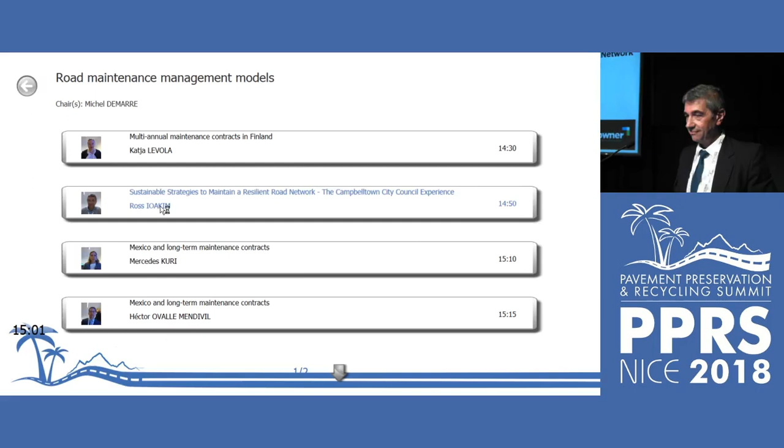As Downer's sector lead local government and airports, provides Ross with an opportunity to work closely with customers in implementing sustainable pavement preservation solutions. I read that Ross worked with SAMI. SAMI, if I'm not wrong, is an acronym for Stress Absorbing Membrane Interlayer.

Correct. You've got it right. That's a company I've known for quite some time. I started from the beginning. Good. Me and Azim are good friends.

Absolutely. And with his appreciation of the issues and challenges facing road and airport owners, Ross's next challenge is to assist with the establishment of a pavement preservation and recycling alliance in Australia.

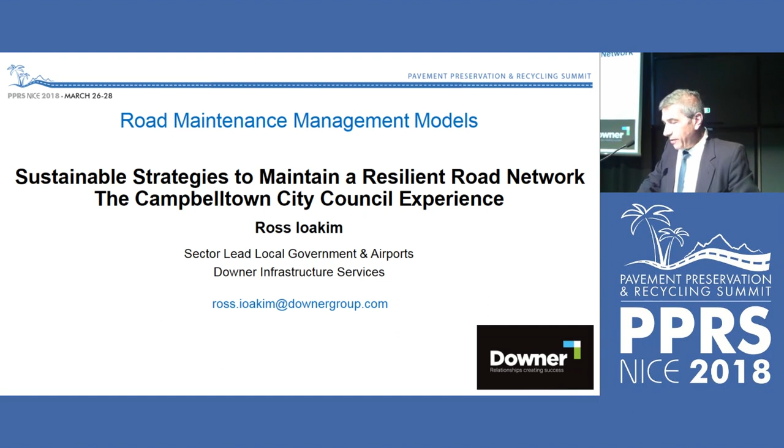So what I'm hoping to do for a little while is to provide you with details of a journey that we embarked on with Campbelltown City Council. The genesis of that journey began back in 2013 when we introduced the benefits of micro-surfacing to a group of Sydney metropolitan councils. So our partnership with Campbelltown City Council continues to grow and has endured through strict commercial procurement processes. Everything in Australia is open tendered.

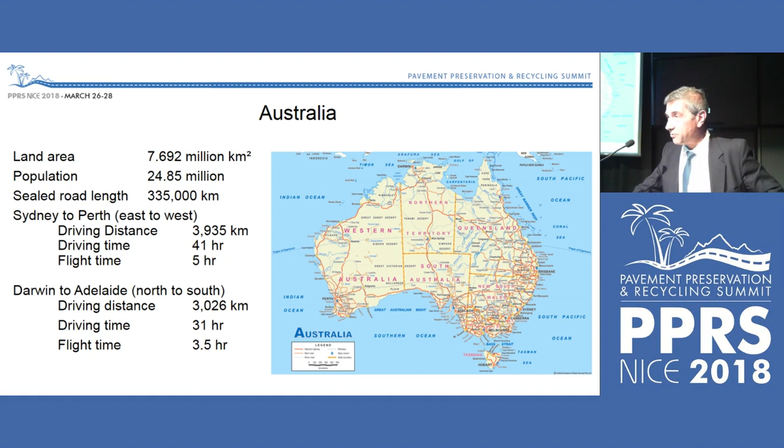I thought I'd just throw in a couple of slides, or one slide, showing you some of the key sites.

If you haven't been to Australia, you should make it your point to come. I spent 32 hours getting here on Saturday, so you should repay that and come across and have a look what a beautiful country we have.

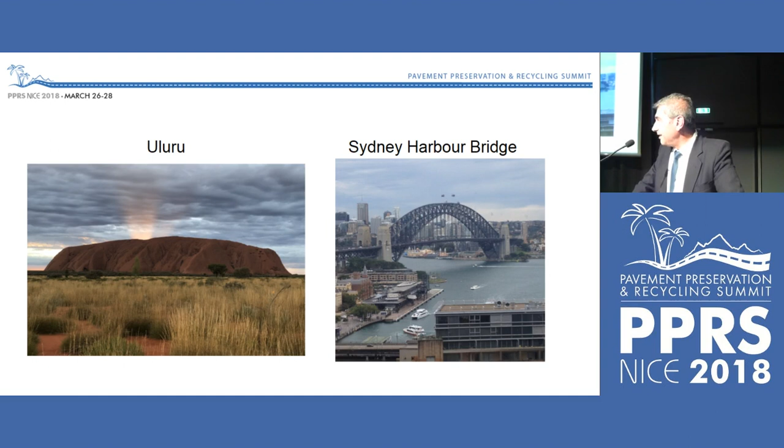So, Campbelltown, New South Wales. Campbelltown City Council, 718 kilometres of road infrastructure, with a replacement cost of about 400 million. This council has had rapid growth from 25,000 people in 1996 to over 150,000. And that requires a significant investment in infrastructure, including the road network, to service the growing residential, commercial and industrial estates.

Campbelltown, you can see where it is on the map. It's 55 kilometres south of Sydney. It's referred to in Australia as an urban fringe council. So it's not an inner city council. It's where housing developments go so we can house our people. It's got a lot of housing estates. Every capital city has got 10, 12 major councils that surround it as growth councils.

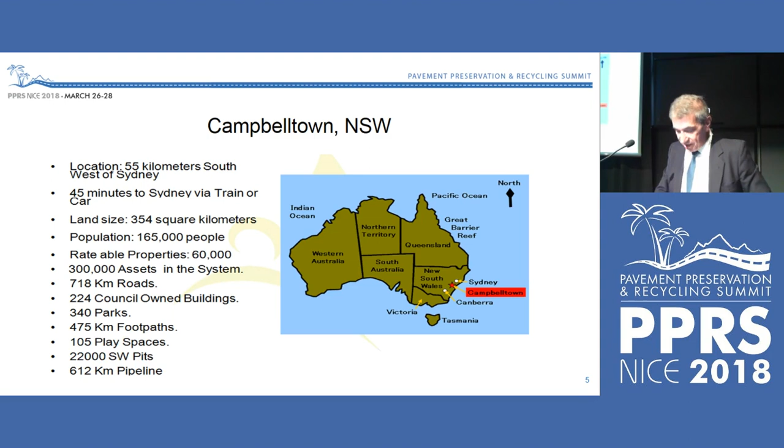So this council had recognised they need to do something else to manage their ageing road network. And the challenge was there for the councils, and we took the challenge up with them to help them understand a better outcome. So, due to the increased financial pressures to maintain local community expectations of smooth roads, Campbelltown City Council has developed and adopted a sustainable pavement management strategy that optimises the budget capacity and also meets local communities' expectations.

So typical of urban fringe councils like Campbelltown, there's a proportion of the road network that is classified as rural. And a lot of these councils are facing the pressures to resurface existing spray seals and provide smoother surfaces, which their residents demand, because we always hear, my son can't ride his skateboard on the road because it's too rough. And we say to him, he shouldn't be on the road. But anyway.

So the following slides will provide an overview of the sustainable pavement management strategy and demonstrate how Campbelltown City Council has increased the number of roads it treats annually, whilst improving the overall condition and satisfying their community's high expectations, all within existing financial budget constraints. So here we go.

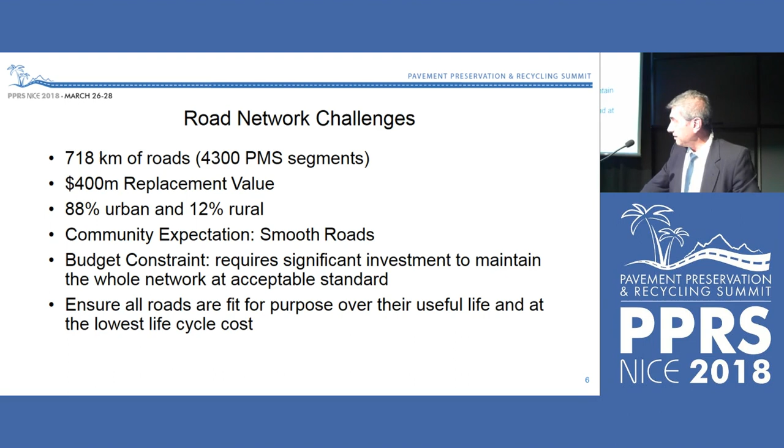You've got to start off knowing where you're at. In Campbelltown City Council's road management plan, they have developed levels of service for all the classes of their roads to provide a basis for the life cycle management strategies. The levels of service support the council's strategic goals and are based on customer expectations and statutory requirements. The council-endorsed levels of service provide the road asset management team with guidance and scope of current and future services.

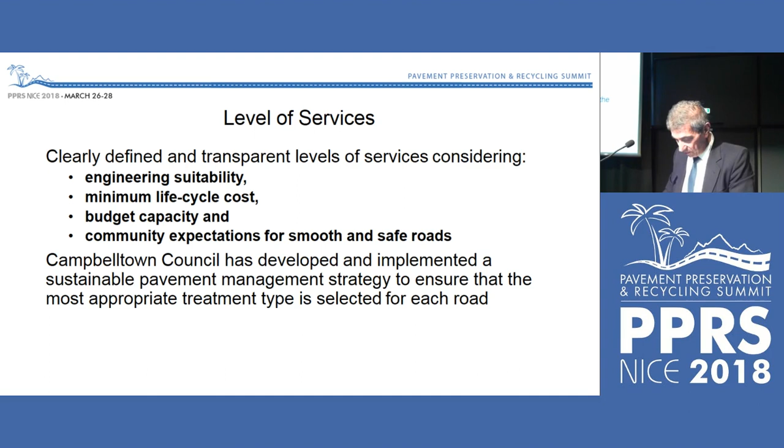Now, you can't do much on a road without data. You've got to know where you are, and it helps to work out, when you've got there, have I done anything that's actually improved it? So they undertake data capture and condition assessment annually on 20% of the network. They store, manage and analyse it in a proprietary PMS. I'm sure you all understand the benefit of good data.

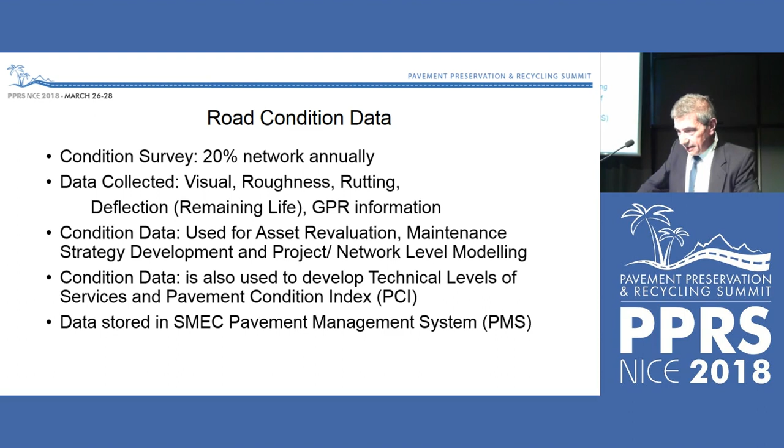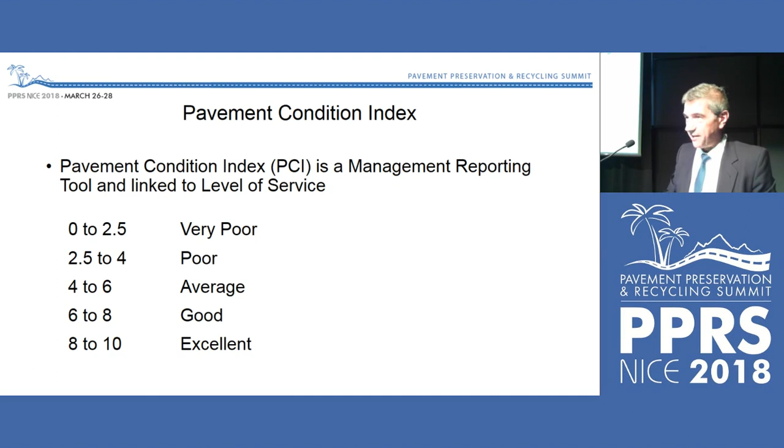They have adopted the Pavement Condition Index ranking to assign a PCI score which assists with funding applications and is used to report overall road network condition to the community. So 0 to 10 is their ranking, you can see that for yourself. It's not a bad reporting tool to have a PCI. They use an algorithm to come up with it. Don't ask me how they do it, but it's quite robust.

In 2002-2003, Council decided to upgrade and maintain its whole network on different PCI levels based on the classes. And you can see obviously a higher class of road like a collector road has got a higher PCI than a cul-de-sac or a residential road. They agreed on a PCI target of 6.75.

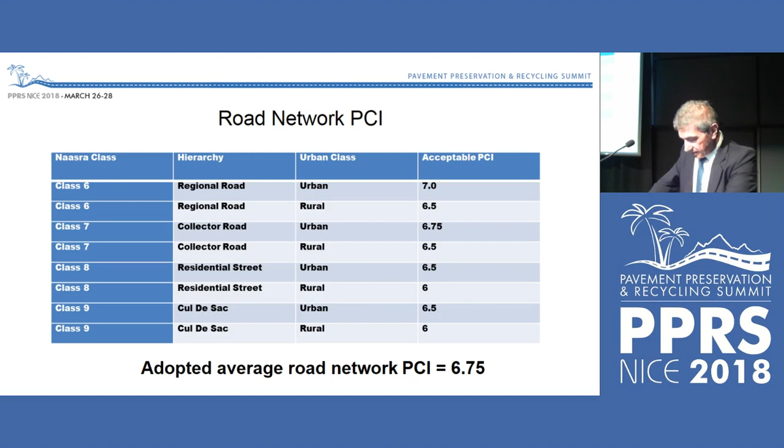This all comes together in the end when you look at how it all happens. The road asset management process is fairly important, and to achieve the PCI target levels that they have set, a comprehensive pavement management strategy was developed. The objective of the strategy was to maintain and improve its pavement infrastructure assets for the long term. The strategy flows through the PMS and considers budget constraints, current road network condition, deterioration curves and treatment options. And the flowchart shows how the PMS utilises data in generating effective and prioritised work programs. So it's hindsight, foresight, all together.

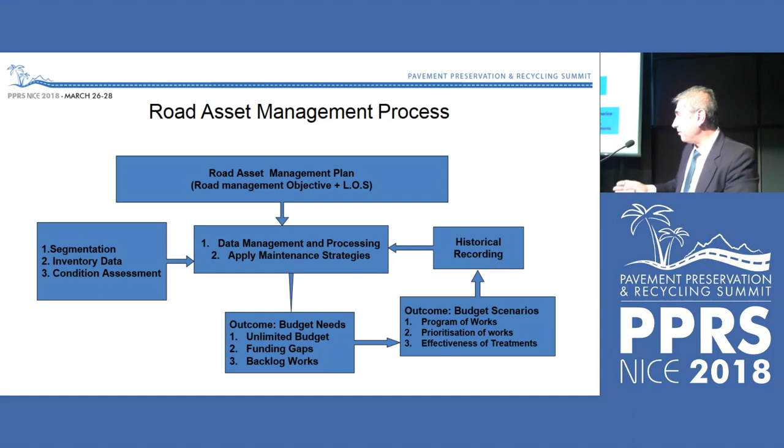So this is what I think the organisers saw about models. It's actually the modelling, not the models. So sorry if you've come to the wrong session.

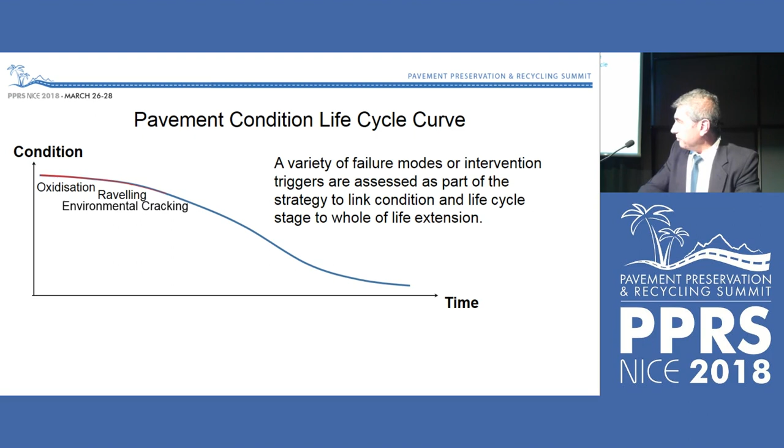This is the typical pavement life cycle curve which you're all familiar with. The road starts off in good condition. Over time, it deteriorates, and that time is what's critical. In Australia, and I suppose most parts of the world, low traffic, low volume roads suffer from the environmental aspects. As life goes on, if nothing's done, you get to the point where the road's stuffed. You're either in a preservation phase or a rehabilitation phase. So it's important to know from your data where you sit on your road network. It's pretty important for each segment to have a good understanding.

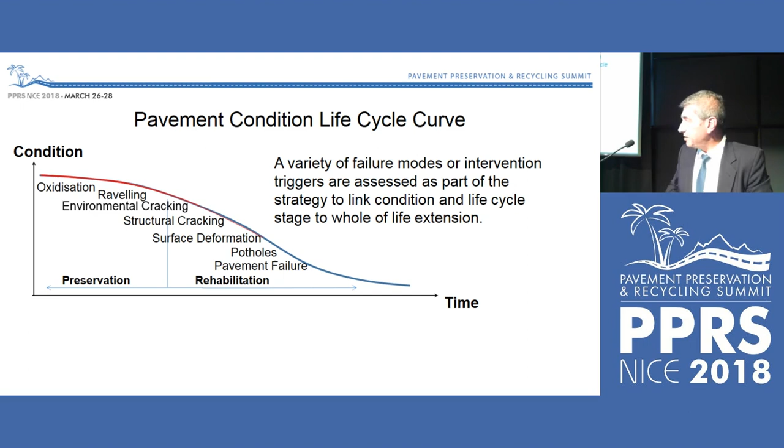So we get into the nitty-gritty, strategy development. A variety of the failure modes were assessed to identify each individual road segment's PCI rating, which is used to identify the most appropriate treatment options to extend segment life and improve its PCI. Treatment options are assessed on a cost-benefit analysis. And the PMS which they've got assists with predictive modelling, including maintenance application choices, intervention triggers, and life cycle costing.

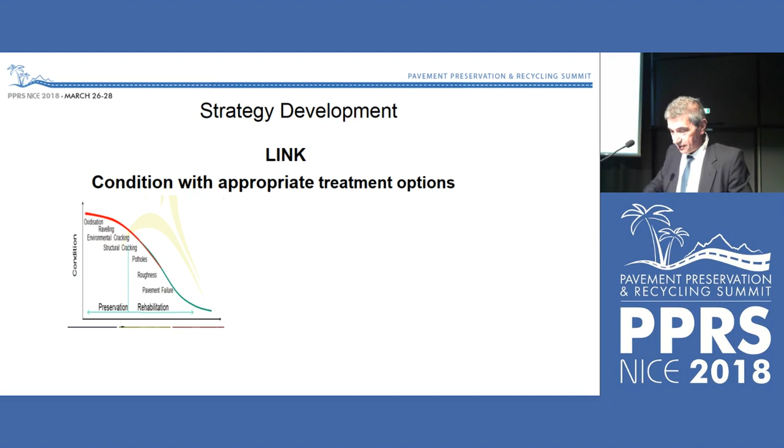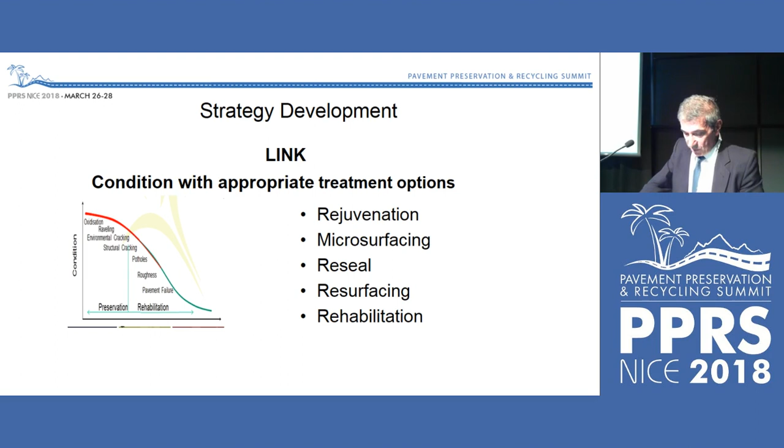And here's a list of some of the treatments that are currently used by Campbelltown City Council. I've got to say, for one of our clients, they use every treatment option available to them. And the key thing that they have done since we started working with them is that they've integrated pavement management treatment options in the pavement management system to achieve what they believe is long-term financial sustainability in its road network management.

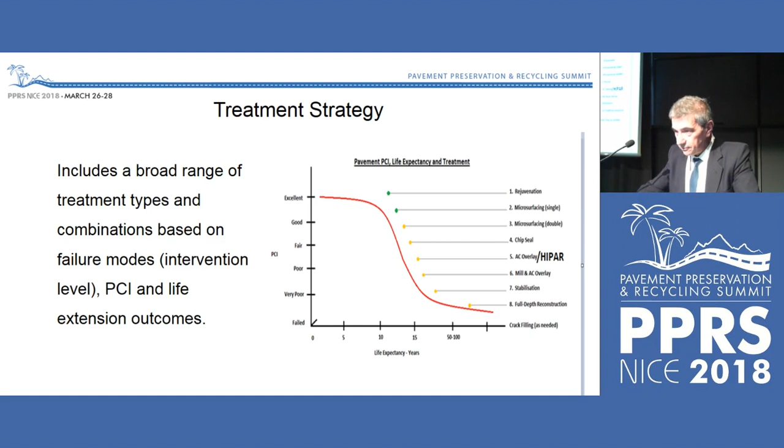And I'm just going to give you some, because I know you'd like to see pictures, we all like to see pictures, just some photos of some of the road maintenance treatments that are used. Now, rejuvenation and a polymer modified mastic, these are spray applied treatments. They're a thin surfacing treatment, early intervention treatments which are aimed to halt oxidation. Australia has adopted these treatments sparsely, some better than others, but commonly they are used.

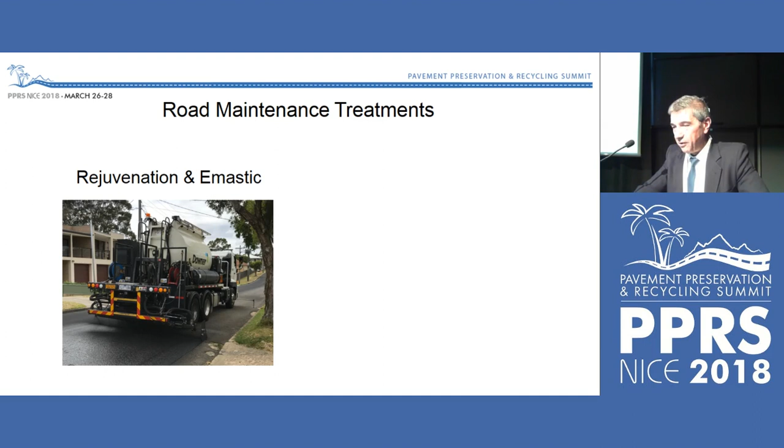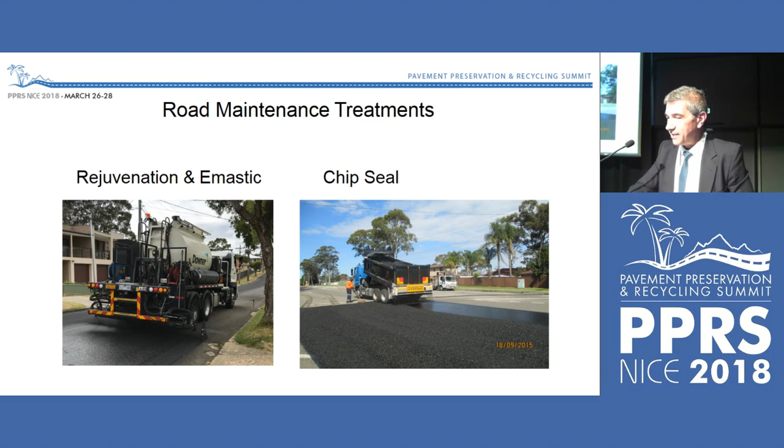As I said before, chip seals are the common treatment in Australia, not so much in the urban areas, but certainly in the regional areas. However, urban fringe councils, councils that are struggling for funds, still use chip seals because they're the most cost effective. And from a life perspective, rejuvenation, the polymer modified mastics, you should get a 5 to 7 year life extension. Chip seals will give you up to 10 years.

Then we've spoken about microsurfacing. Microsurfacing, the life is 10 to 12 years before you need to retreat. The key thing that I stress is that you need to know what is the treatment that you should be doing after you put whatever you have down. So it's about working up the life cycle of the treatment as well.

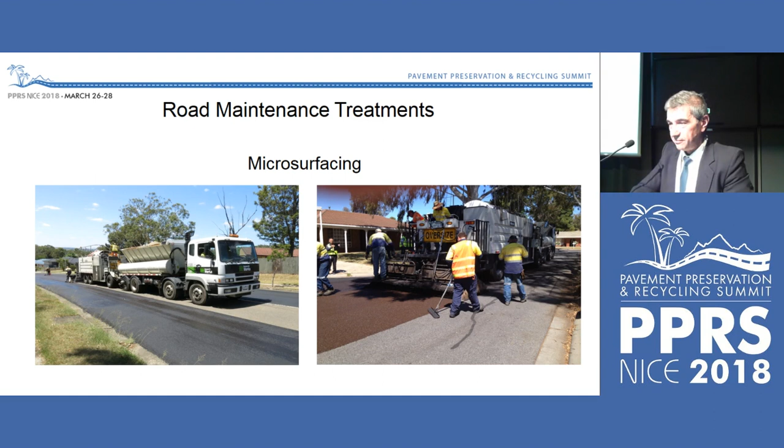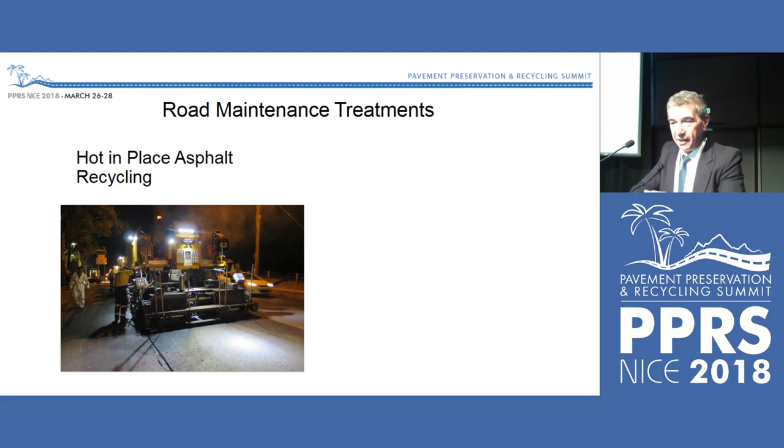Hot in place asphalt recycling. This is one council in Australia that still uses this. It's not used a lot, but they're seeing it from a sustainability point of view. If you've got good shape and it's just the asphalt that's got some age, environmental cracking, it's much more effective than doing hot mix, which is the default treatment for everybody, probably the highest unit cost in Australia.

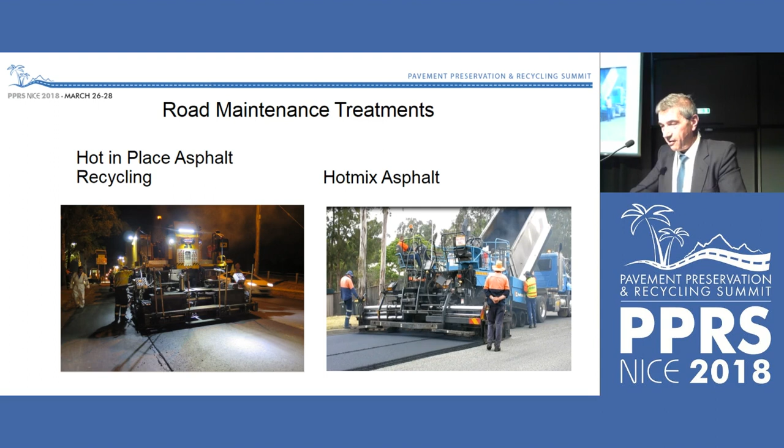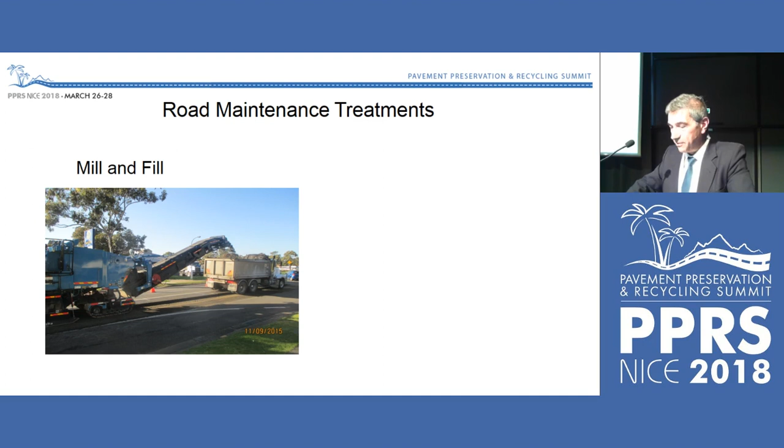And then we talk about mill and fill or inlay type work where you're taking off. Luckily in Australia we utilise all the RAP. It goes back in anywhere up to 40, 50, 80% depending on what plants you have, but RAP is an important component of roadworks to keep the cost down. And certainly in situ stabilisation, foam bitumens, combination of binders, cementitious. So the whole gamut of treatments is used by Campbelltown City Council.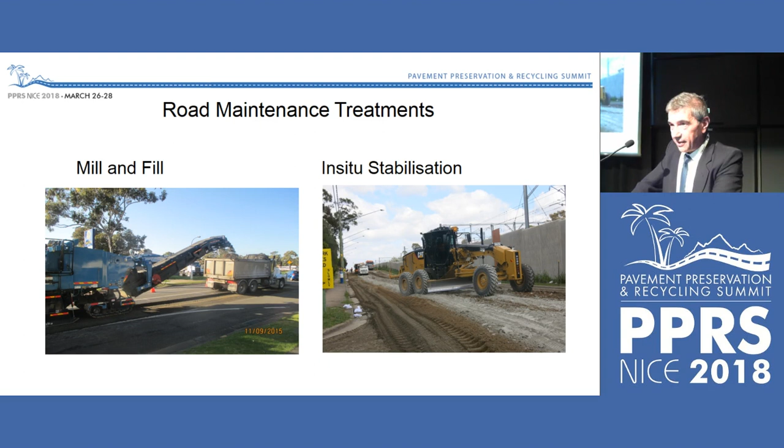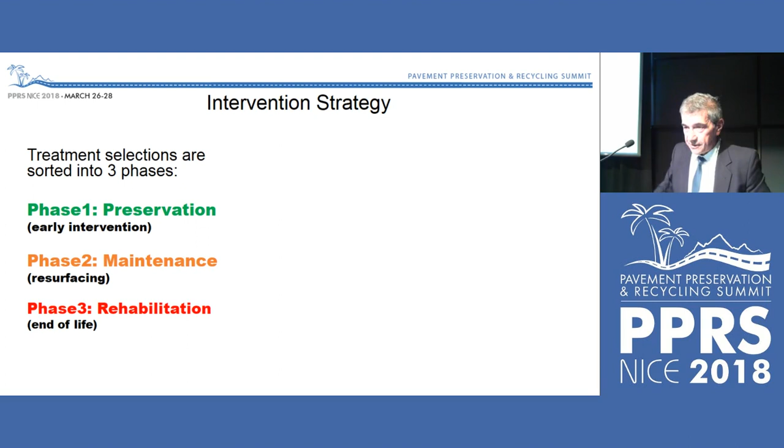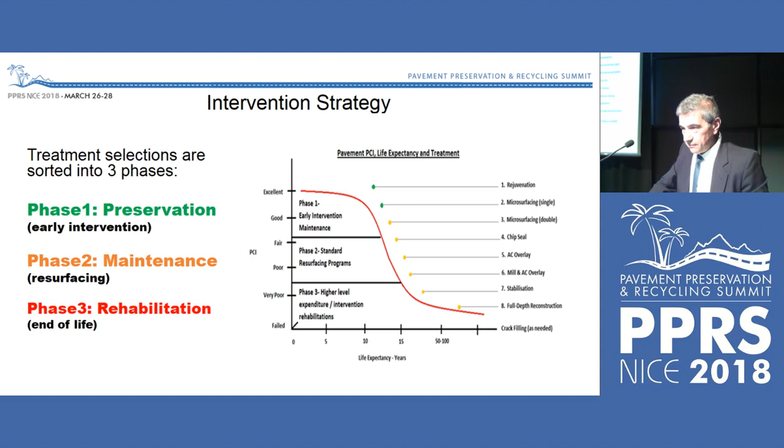So this slide explains how part of their strategy is to look at their data. Where is the road, in good condition? Is it in fair condition or is it in poor condition? And they allocate the treatments depending on where it's at. So 3 phases of treatments: preservation, which they call early intervention, a maintenance phase, or a rehabilitation phase. Okay.

So the thinking there is you want to keep those roads in good condition for quite a while. So if the road's in good condition, they'll actually program to retreat with a preservation treatment every 5, 6, 7, 10 years, depending on where it's at, to stop it going down to phase 2. And phase 2 is where most of the work is done. Asphalt, mill and fill. They're the treatments that you do to stop that segment of road going into a rehabilitation requirement.

So the whole strategy is keep your good roads in good condition. Your phase 2 roads, stop them from going into a phase 3 position, which means higher dollars to rehabilitate. Pretty simple strategy. But they've actually got their funding model set up to achieve that.

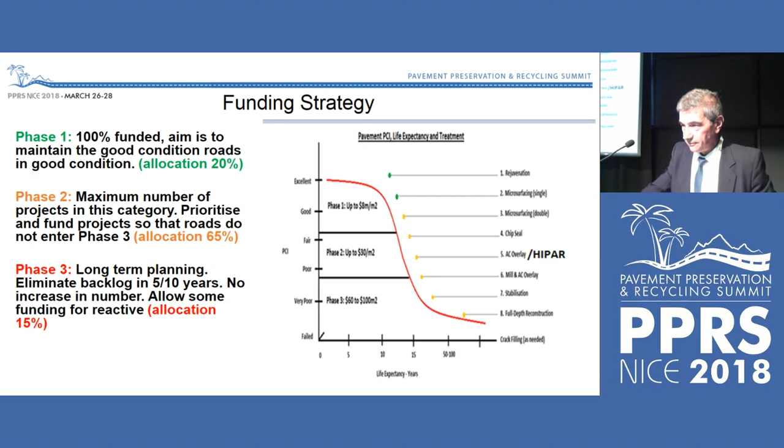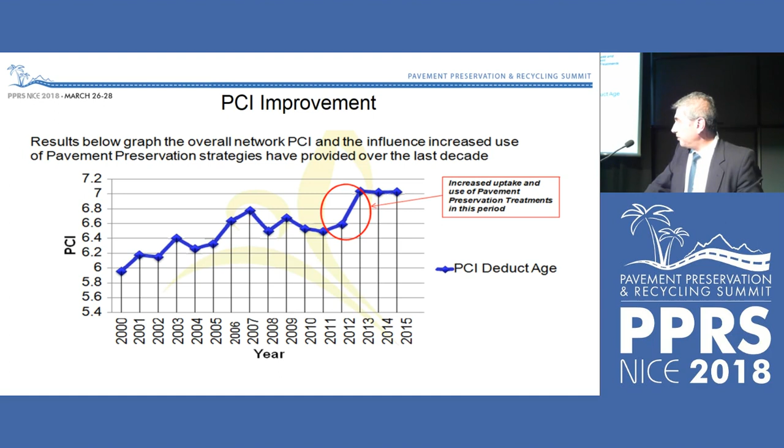But they have observed in about 2013 a bit of an uptake from about 6.6 to 7 when they adopted the pavement preservation treatment strategy into their PMS. And they continue to do more and more pavement preservation, keep their good roads in good condition for longer. Some of the trends, obviously you can see the PCI going where it is, but also cracking and ravelling have been arrested, showing that the environmental type factors are being fixed up now.

One of the things we have noticed here in Australia is the change in bitumen from locally produced to imported. We're noticing that the road network, especially in the areas with low traffic, is starting to show signs of oxidation much earlier than it used to. Probably by year 8, they need some form of treatment before they start to ravel. So changes around the world are affecting Australian roads from the point of view of bitumen importation.

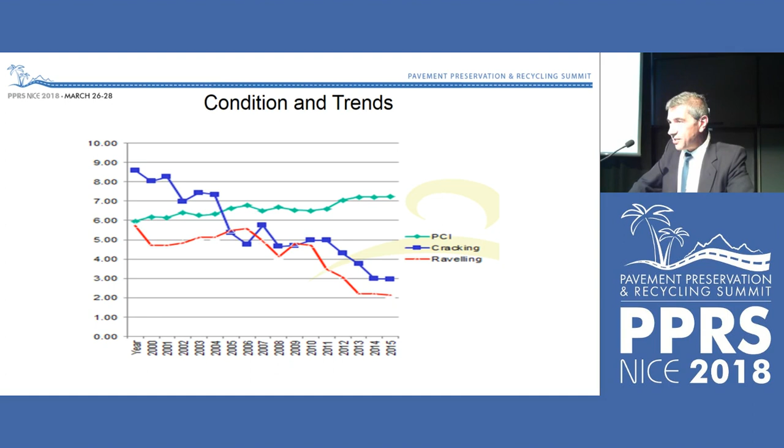And these are the roads that are generally in the urban fringes where the subdivisions are growing and growing and the roads aren't lasting to what was expected. We keep on getting asked, I've got a road that's 30 years old with 30-year-old bitumen and it's in great condition. I said, well, unfortunately, you can't get 30-year-old bitumen anymore. That was good quality. We've seen a change, as I said before. It's unfortunate. I'm not sure if you're seeing that as well.

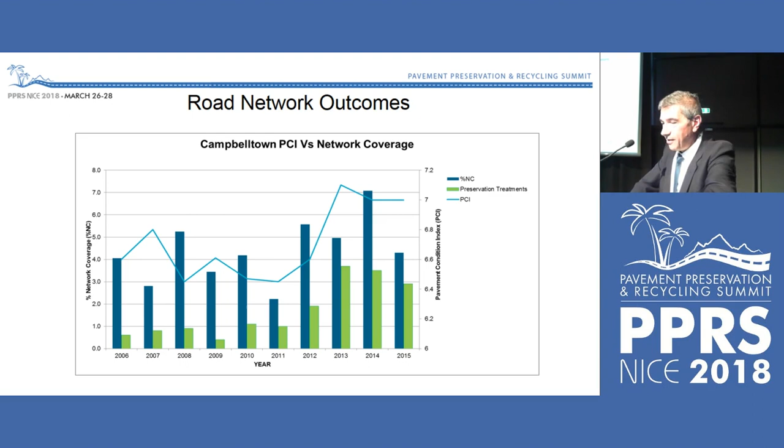As you can see, our friends at Campbelltown, their aim is for a network coverage, which is on the left-hand side, anywhere from 7% in 2014 up to 4%. So they understand that they need to do around 6 to 7% of their road network. So it's a key indicator for most people to know what you're actually doing. And you can see the PCI is keeping trend, and the green chart is the amount of pavement preservation treatments. So with the lower cost treatments, you're covering a lot more ground for no additional cost.

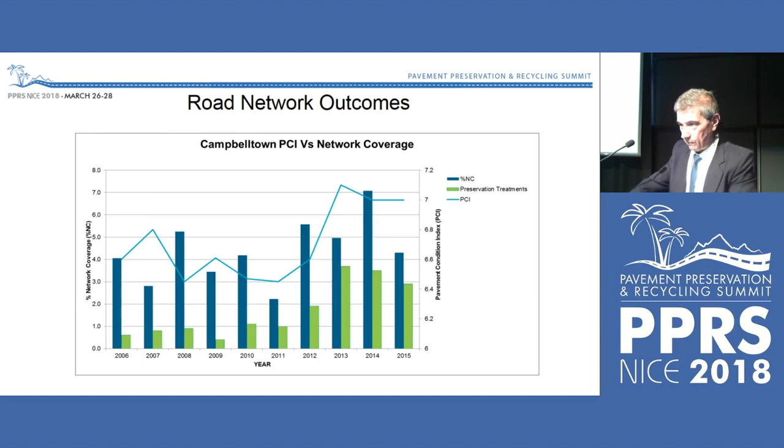Could you please go to the conclusion? I will. 2 more slides. I'm there. Thank you very much.

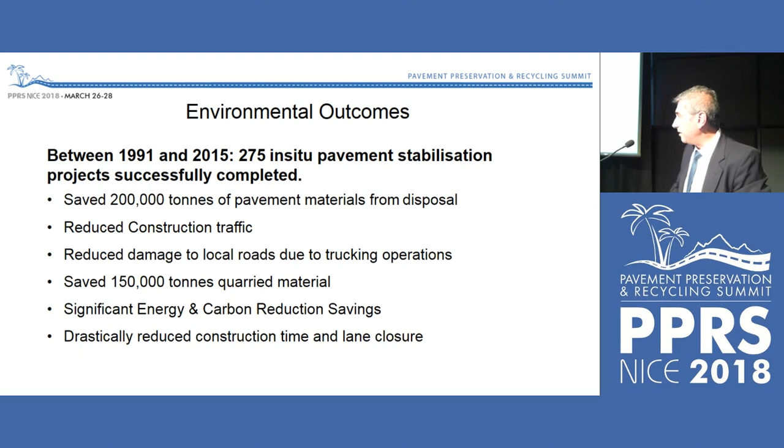Just the last thing, environmental outcomes. You can see there that by adopting in situ recycling, there's been quite substantial environmental and social benefits by changing from reconstruction to in situ stabilisation. And also from a financial perspective, they've been able to cut back their backlog of roads from 33 million to 12.5 million in a 15-year period.

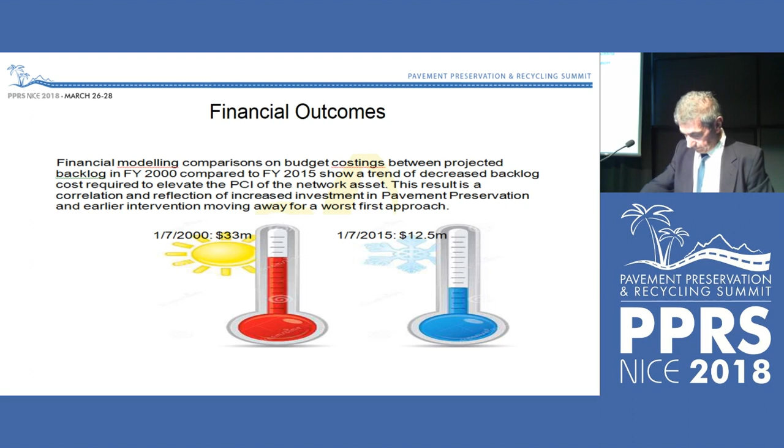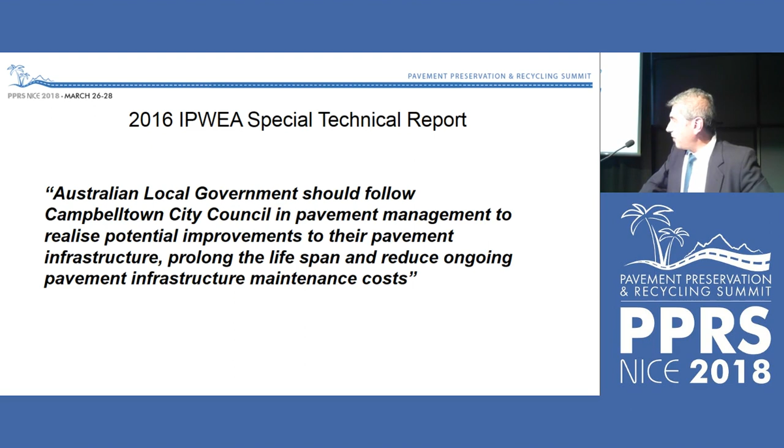You can all read that, but this says a lot from the IPWEA, the association that represents the local government engineers. And that's a fairly strong statement. They've had an endorsement that they certainly are keeping ahead of the game in the way that they manage their road network. That's just a pretty way of showing how it all goes together.

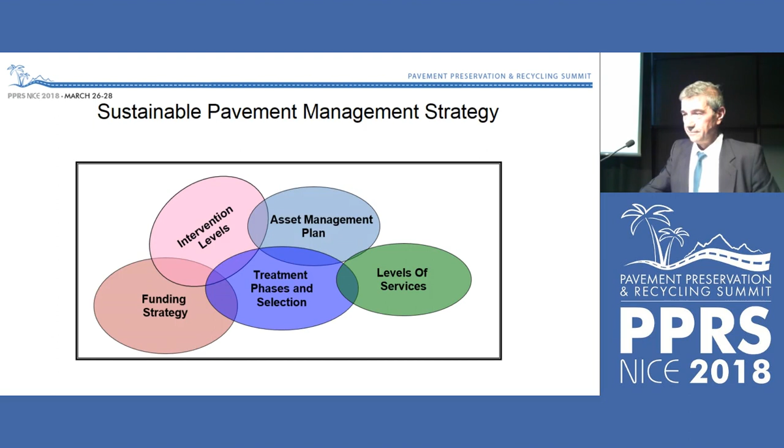So in summary, the outstanding results are a direct reflection of the proactive approach taken by Campbelltown City Council's asset management team and adoption of an innovative and sustainable road asset management strategy, combined with the adoption of pavement preservation treatment options for the maintenance of roads in good condition to further extend their lifespan.

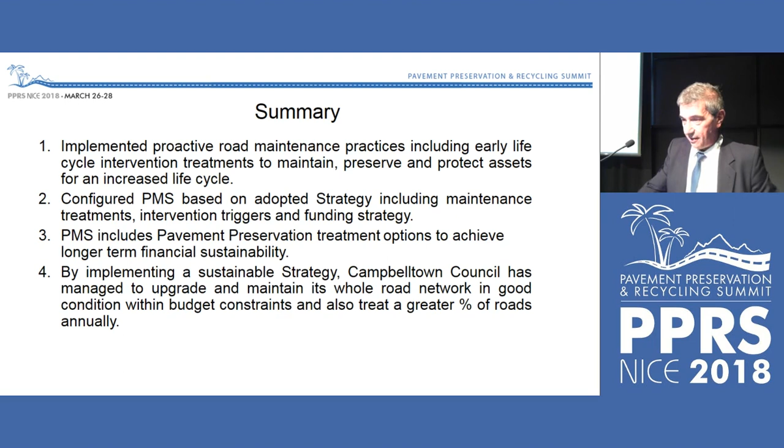So it's been a really rewarding journey for both them and us, and I'd like to acknowledge the gentleman who we work with closely, Mahbub. He was presented with the International Slurry Surfacing Association's Award for Excellence in Pavement Asset Management International, and he's gone to present this presentation all around Australia, and he keeps on winning awards. It's a very simple strategy which other councils are starting to adopt.

And not only that, but our team at Downer and Paul who manage that in delivering the outcome. So it really shows what a great partnership between a service provider and a local authority can achieve in better outcomes through your road network management. Thank you very much.

Thank you very much, Ross. Any questions from the audience? I wouldn't expect so. I'd covered it pretty well. No question? See, I said this paper was in the wrong session. Excellent. Thank you very much. Thank you.